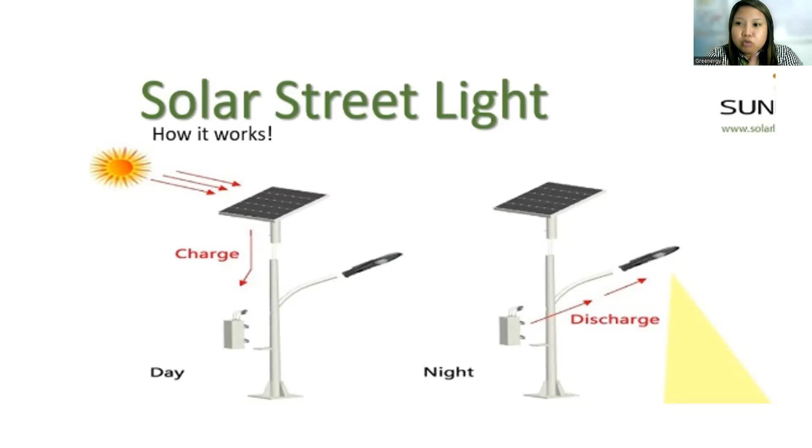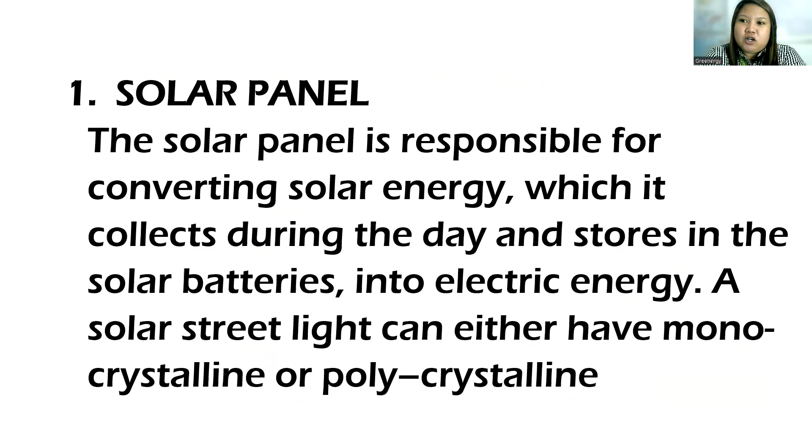This is Google's explanation about the four components of solar street lights. So the solar panel is responsible for converting solar energy.

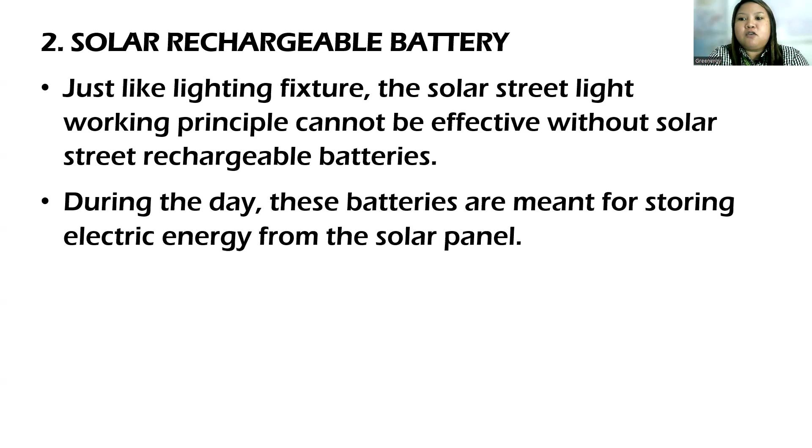Then the solar rechargeable battery, just like lighting fixtures, the solar street light's working principle cannot be fulfilled without solar rechargeable batteries. During the day, these batteries are meant for storing electric energy from the solar panel.

Lighting fixtures should be high lumen LED lights, optimizing efficiency while maintaining low energy consumption. LEDs are usually used as the primary lighting source of modern solar street lights, as the LED will provide much higher luminosity with lower energy consumption.

Next is pole and pedestal. The pole is the final component to a successful solar street light system. The pole needs to be strong enough and tall enough to mount the solar above the fixture, while ensuring the fixture is mounted at the correct height for effective spread of light on the ground. The pole has to be strong to meet wind load requirements. The poles are available in steel, aluminum, fiberglass, composite, or concrete, and can either be direct bury or anchor base.

Pedestal is the base or support on which the pole is mounted. So that's the four components of solar street lights.

This presentation is still understandable. So this is the lighting arrangement: staggered arrangement, single-sided arrangement, opposite arrangement, and twin central arrangement.

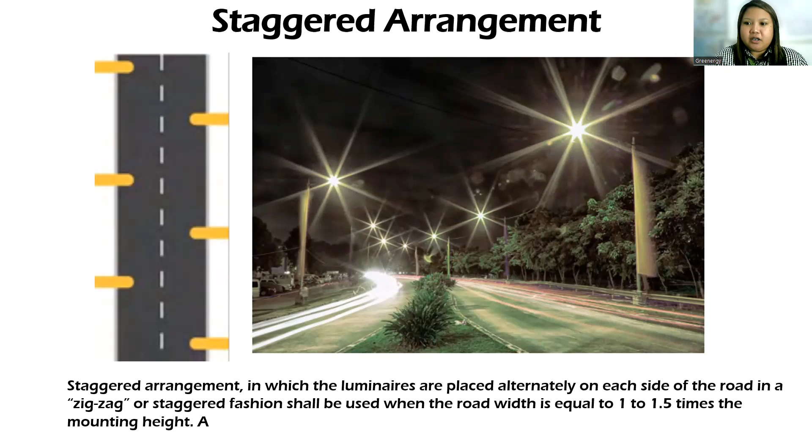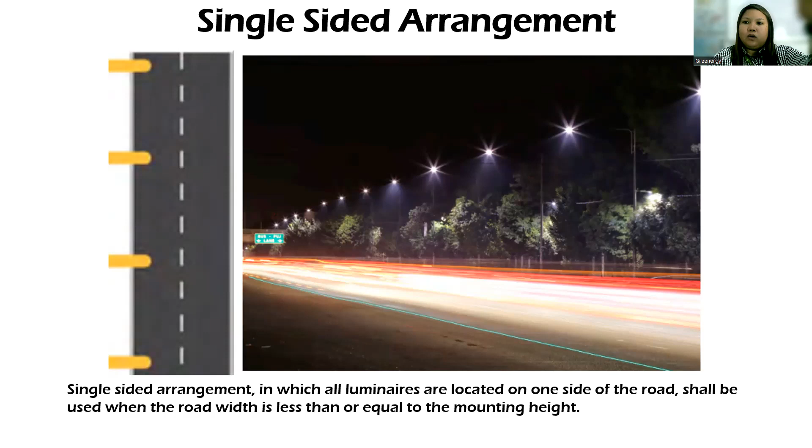Next is single-sided arrangement, in which all luminaires are located on one side of the road. As you can see, it's single, it's straight. There's no left and right position, just one straight line of solar street lights.

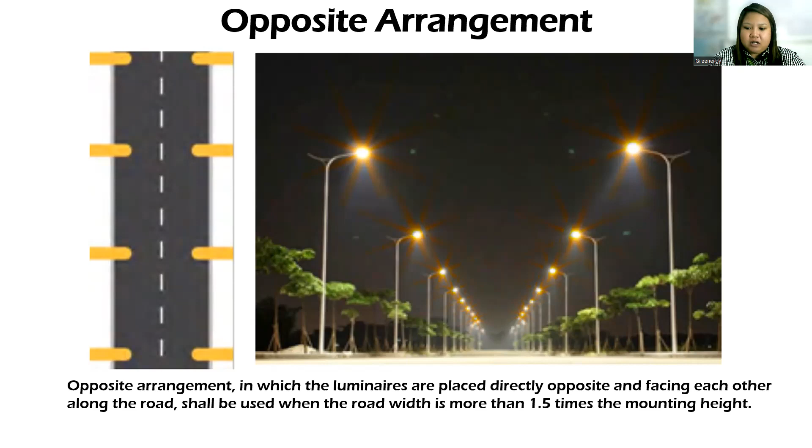Next is twin central arrangement.

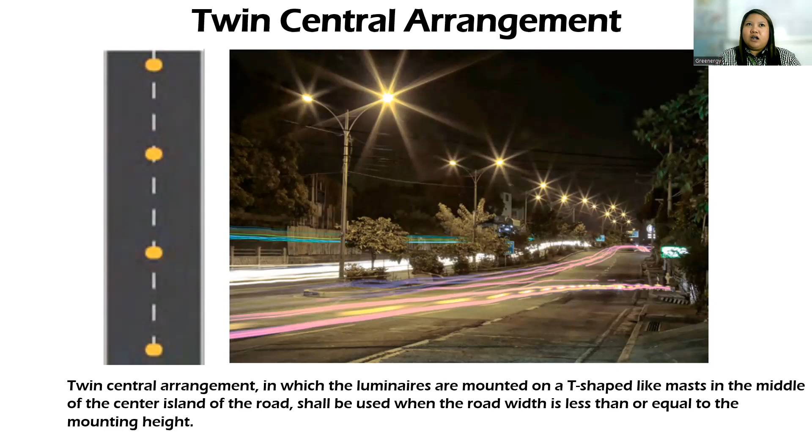So this is the common types of solar street lights. These are the common lights that we introduce to our clients, which are effective for them. First is all-in-one or integrated SSL. Second is all-in-two or semi-integrated SSL. Third is all-in-three or conventional SSL. I think everyone is familiar with this.

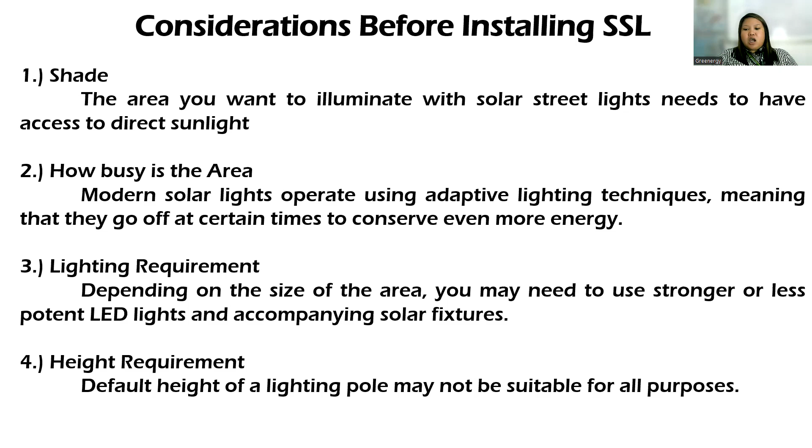We are introducing you today about the street light survey form.

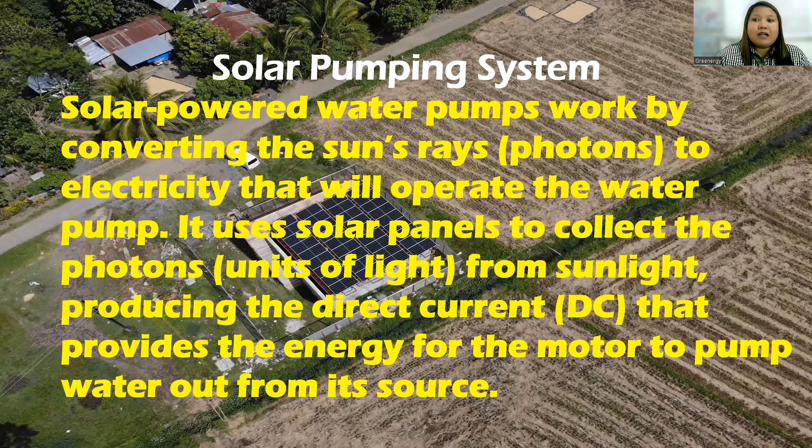This presentation will help us determine what materials are needed for this system. So let's move on - this is a survey form.

Fill out everything - first the information, second the kind of agency, what project, who is implementing it, for example LGU, Kalahi, private, PDA, BARMM, and others. Please indicate here who the client is.

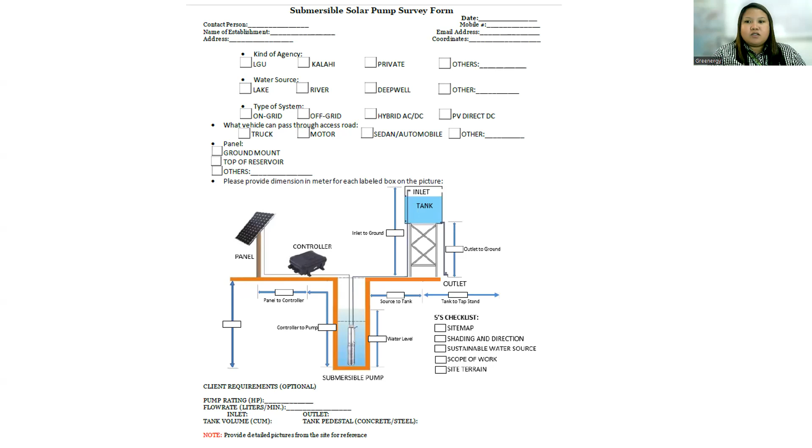So dagan na kayo chika, next na ta, concept for pumping. So ang concept din sa pumping, mo pump siya. So naa siya pressure, naa siya flow, naa siya power. So purpose of designing solar pumping system, pressure can be thought of as the work that pump must overcome to

move certain amount of water. This is most often expressed in either feet or pounds per square inch. It's also referred to as pressure loss. Piping diameter, length, bends, and restrictions such as valves also affect how much pressure is lost and needs to be created by

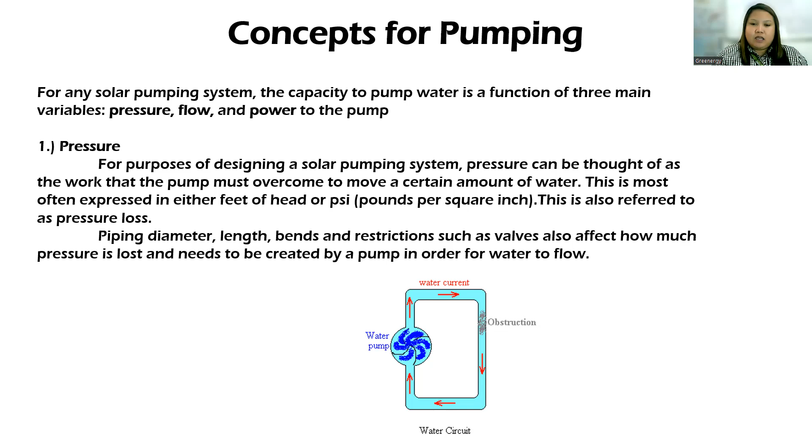So concept for pumping again is flow rate. So flow rate is the amount a system can move during a given time period. It is usually talked about in terms of gallons per minute or gallons per hour. If everything else remains the same, flow will decrease when pressure increases and vice versa.

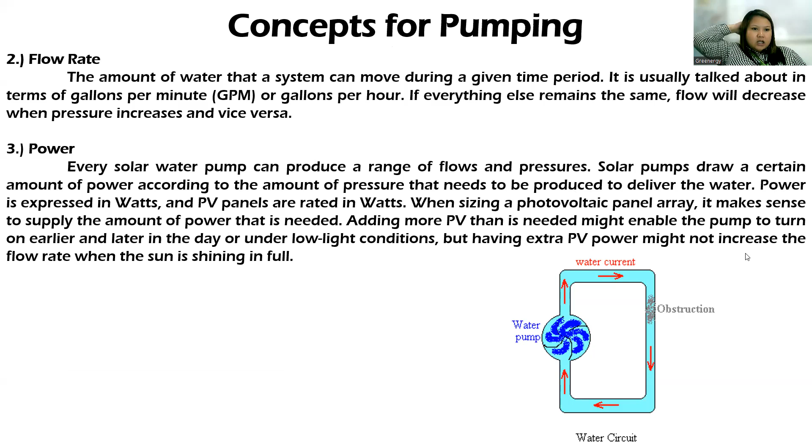PV panels are rated in watts. When sizing a photovoltaic panel array, it makes sense to supply the amount of power that is needed. Adding more PV than is needed might enable the pump to turn on earlier and later in the day or under low light conditions, but having extra PV power might not increase the flow rate when the sun is shining in full.

So next is components of the solar system. So this is the illustration again for the solar pump system. So solar array, pump controller, water pipe, same na rin siya sa survey. Float switch, para asa gid kaning float switch no? Nganong naa man ni siya diri? Water tank, then distribution line.

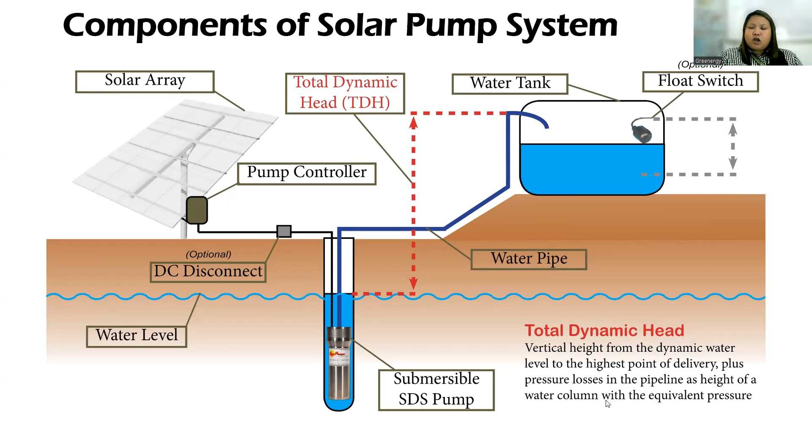Total dynamic head: vertical height from the dynamic water level to the highest point of delivery, plus pressure losses in the pipelines, expressed as height of a water column with equivalent pressure.

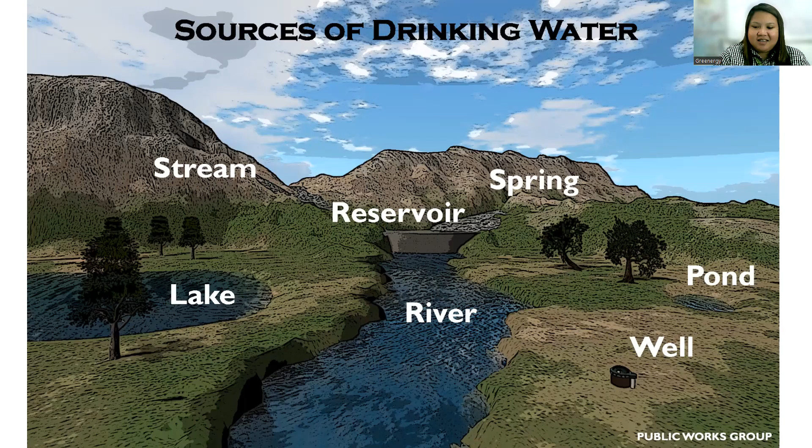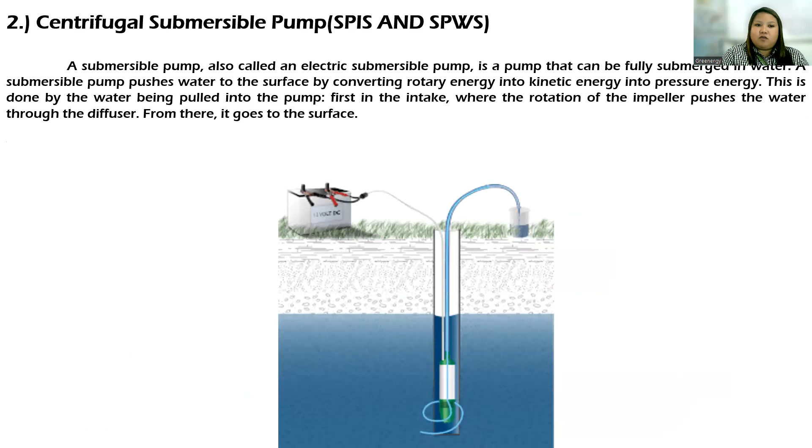This is commonly used in our projects as a submersible pump. For the centrifugal type, water is pulled into the pump first at the intake, where the rotation of the impeller pushes the water through the diffuser. From there, it goes to the surface.

Next is the centrifugal surface pump. Centrifugal pumps are the most popular and commonly used type of pump for transfer of fluids. We use this for sump areas or to drain water from an area. These are water pumps.

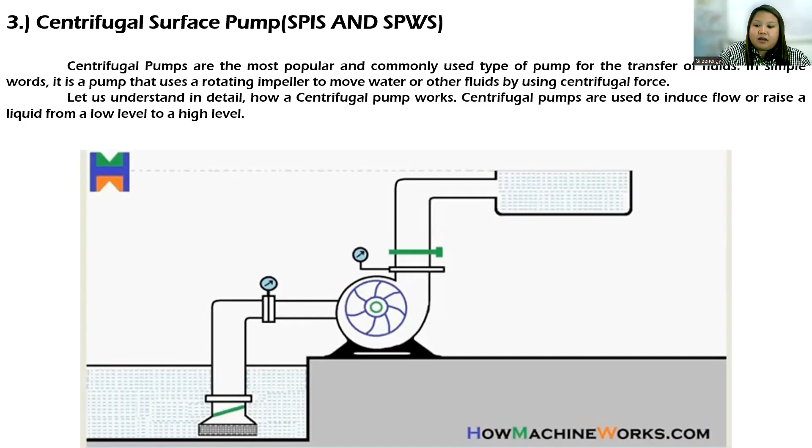Let us understand in detail how a centrifugal pump works. In centrifugal pumps, they are used to induce flow or raise a liquid from a low level to a high level. So at least you're now familiar with these pumps: submersible pump, centrifugal pump, surface pump. Next is the solar panel.

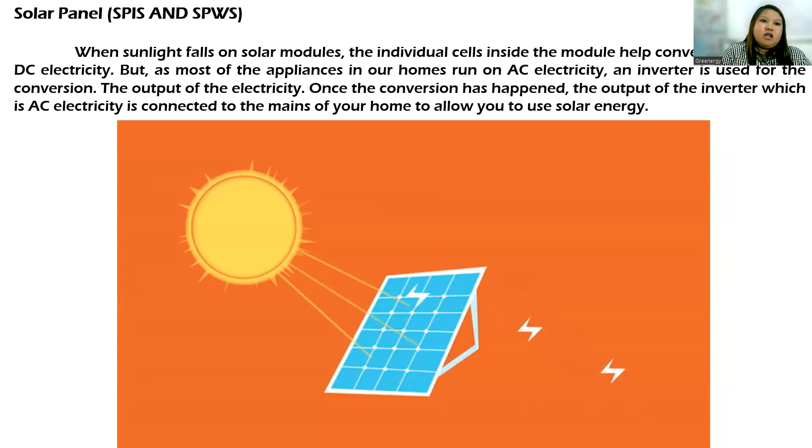These are the components again, the components of the solar powered system and solar powered irrigation system. The solar panel harvests energy from the sun. Next, the wires and accessories run down toward the pump controller. This is a small illustration again of how it works.

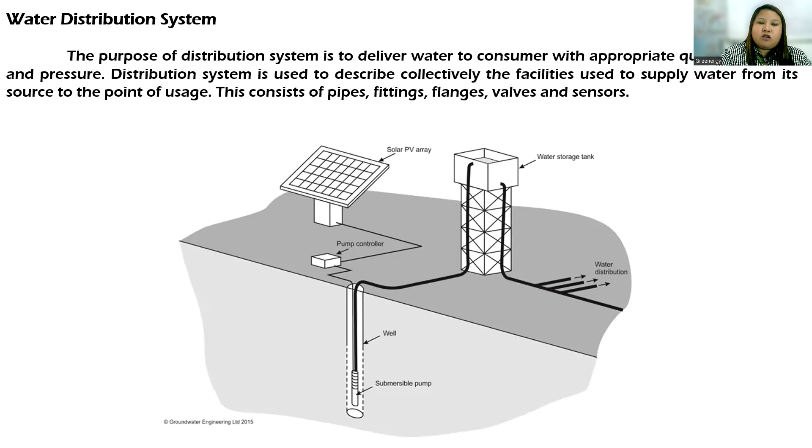So from the pump controller, the submersible pump will generate power. Then after generating, it discharges into the tank, then into the distribution line. The purpose of the distribution system is to deliver water to the consumer with appropriate quality, quantity, and pressure. The distribution system describes the facilities used to supply water from its source to the point of usage, including pipes, fittings, flanges, valves, and sensors.

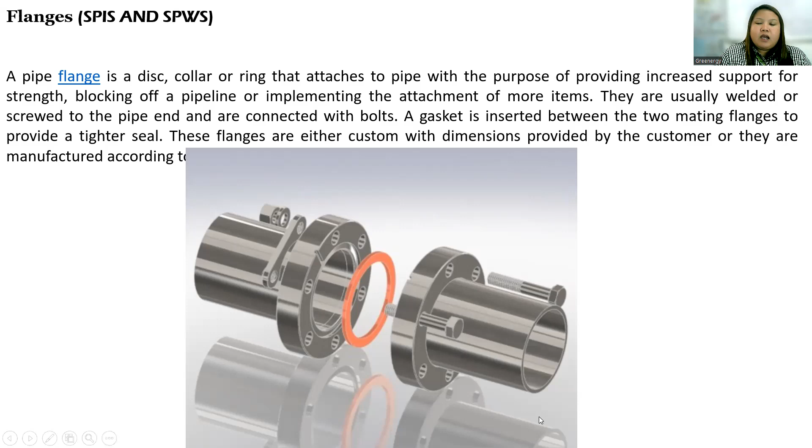Valves are used in SPIS and SPWS, such as gate valve, check valve, foot valve, and ball valve. These are commonly found in the project: gate valve, check valve, and foot valve.

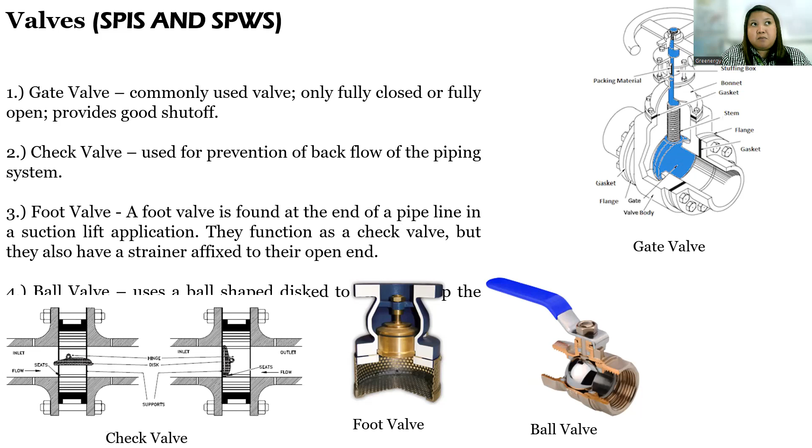The gate valve is a commonly used valve; fully closed or fully open, it provides good shut-off. The check valve is used to prevent backflow in the piping system. A foot valve is found at the end of the pipeline in suction lift applications; it functions as a check valve but also has a strainer affixed to its open end. If you visit existing projects, you will see these valves.